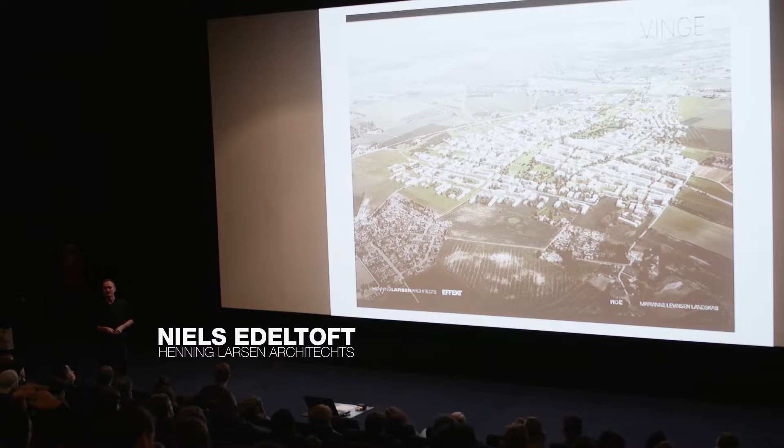But yes, I'm Niels Edeltoft from Henning Larsen Arkitekter, and I've been working at Henning Larsen Arkitekter for quite a while. And I've been connected to the planning of this new city close to Frederikssund for the last 7, 8, 9 years. I just have to explain why I've been connected to that for so long.

And this introduction to Vinge is divided into, I think, 2 pieces, and that's because we were invited to participate in a competition 8 years ago, and it was about developing this new city, Vinge, close to Frederikssund. And there was actually no winner of this competition. It ended up with these 5 teams working in parallel and handing in our suggestions, but no winner was pointed out for that competition.

We worked together, I have to mention that, with EFFEKT Architects and Moe, the engineers, and Marianne Levinsen as the landscape architect. And I think the whole thing was stopped or on hold because of the economic crisis and because of kommunesammenlægning. I don't know the English word for that, but you put various communes in Denmark together, and that created a kind of vacuum. After that, the politicians didn't know what to do, and that was why this whole project was put on hold, and no winner was announced for the first part of this development.

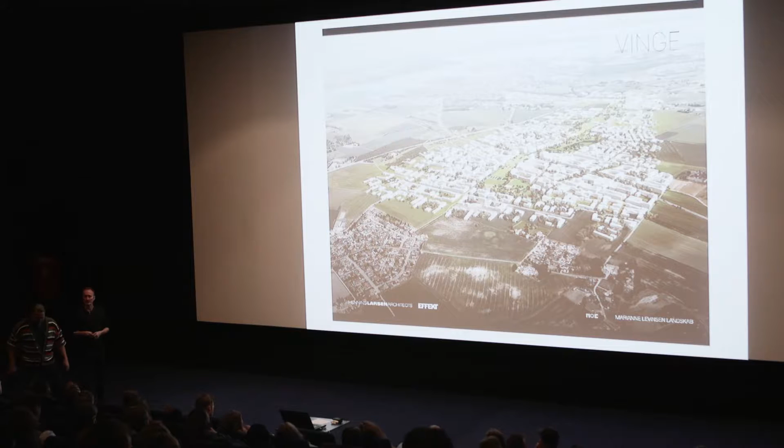Then when the economic crisis eased a bit and things were changing, they started up this whole idea of planning this city here. And actually it's a very old idea; for the last 30 or 35 years, having a city on this spot has been part of the local discussion in Sjælland.

We were invited to participate in this next competition, and the whole program for that competition was actually very much leaning on our idea from the first competition. So in a way we were announced as a winner because the whole program was built on our ideas about how to develop this city. So it was a very good thing that we were part of that competition, and we won that competition.

And then the last part of it is what I would call vision meets reality, and that was the center part of the city. We have been working on that for the last couple of years, and the whole idea was putting this piece of land out for tender so investors can buy the land and start to develop and build this city. So that's the point where all our visions and ideas about the city meet reality. So that's kind of the 2 parts of this.

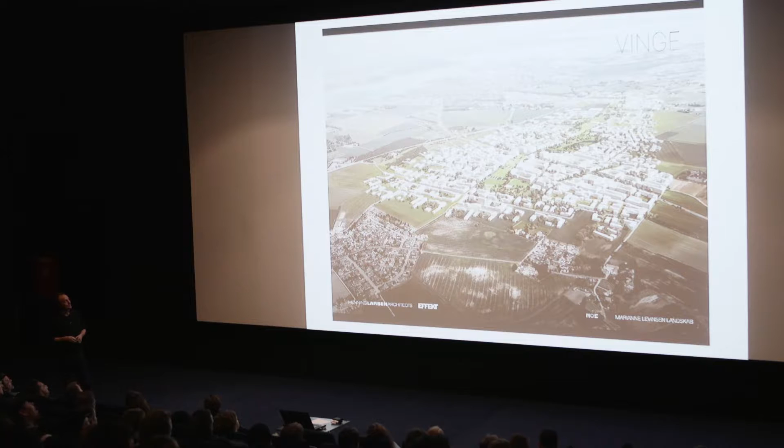The plan for developing Copenhagen, the Finger Plan, I know a lot of you know about it, but it's actually a very old plan, and the whole idea was that Copenhagen should be developed along these fingers of a hand. So you densify the city and all the buildings along these fingers, with infrastructure running along the fingers, and then you have the green areas running between the fingers. So everybody is connected very close to a big green area, and this green area is drawn all the way into the center of Copenhagen. That's the whole idea of how Copenhagen should be developed.

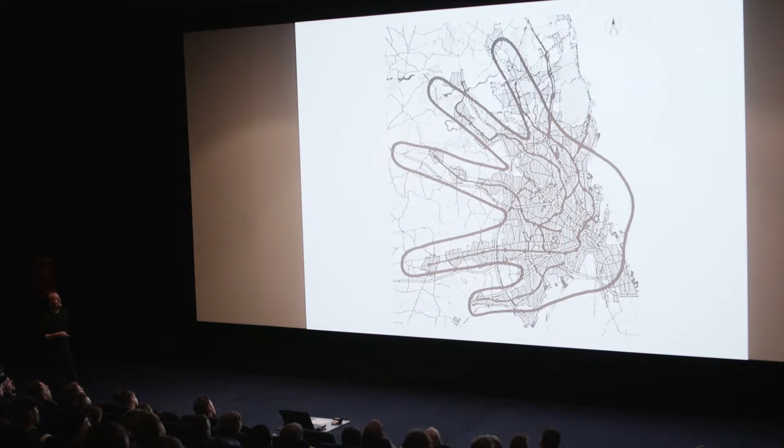When we started this, I will explain about Vinge in the way of how we have been working on this project, what we are doing, and how we are analyzing the site and all that stuff. And hopefully from that you can get the idea of why Vinge looks like it does.

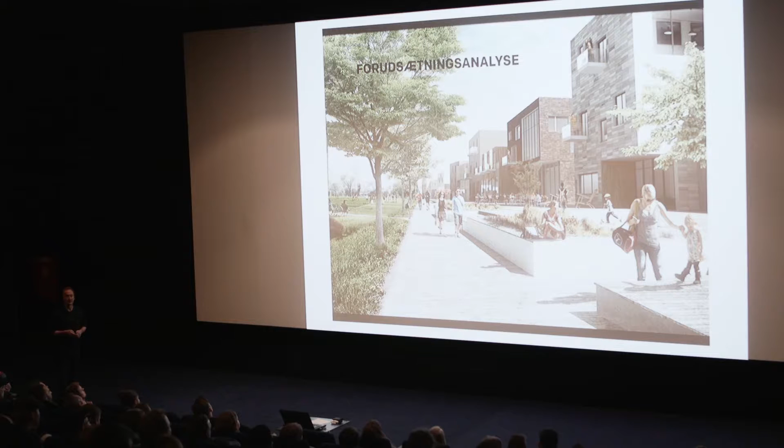And of course we start up with analyzing the context, all the stuff you have on the site already, and from there you develop the main design grip on the city. So you have to have an overall design for that city that is so clear that everybody knows how the city should be developed, and actually make it realistic so the plan can develop from that main idea.

And when we look at the existing conditions up there, we have of course some topography we have to regard. Compared to other places in Denmark, it's quite hilly. You have a difference of 10 or 15 meters, a very hilly landscape up here, and that's of course part of the whole site.

And then you have the existing buildings up there, mainly farmhouses or smaller villas. There's not much going on this side here, so it's a nice place to develop a city, because you don't have that many buildings to respect. And at the same time, it's a rare situation that you don't have an existing city to develop from, but you have a kind of a clean canvas to work on.

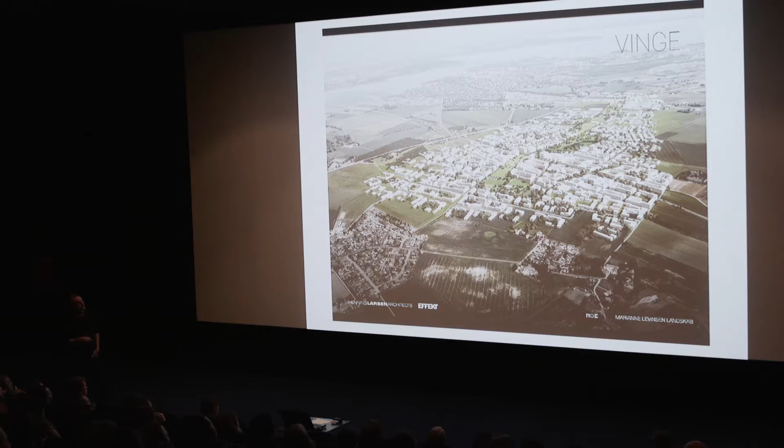I have to go back to this picture to explain that, from the beginning when I talked about the finger plan for Copenhagen, this part of the city, the eastern part of the city, is a very beautiful place with a swampy area and lake, and all that is connected to the green corridor running all the way to Copenhagen. And the other side of this city, you have Roskilde Fjord out here, and from these higher points on the site, you can actually see the fjord. So that's why the city is very well connected to both trains and cars and nature. So it's a very good position for a city.

So all these images are a way to show how we work, how we map the conditions on the place out there. And the next thing is to make a vision for the city. How is the city going to be? What is in the city, and how is it going to be developed? So this vision for the city meets the reality on the site. And the whole idea about the main structure for the city is this long green corridor or spine or heart running through the whole city.

If you look at cities that are about the same size as this in Denmark, you have all the common things. I mean, the sports field, the churches, the kindergarten, the elder houses. All these common things where people go and meet, they are spread like small dots around the city. And the whole idea about this was to drag all these activities into one long spine that connects the whole city. So when you go into the green corridor or the green heart in the city, you have all these activities going on along this corridor. So that was kind of the structure we put on the conditions that were already out there.

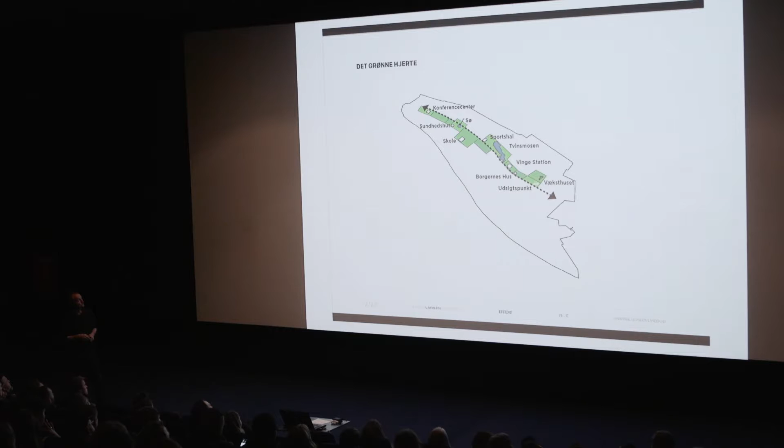So this is the situation with the train running through the site here, and then this green heart running north-south in the city. The next step from this is to divide this into smaller areas, like you saw in the film. It's very important that we at the end look at how is the life between the houses, how does that work, and how do people live, how do people feel the city, and not feel it at 60 kilometers an hour or 100, but when you walk around the city.

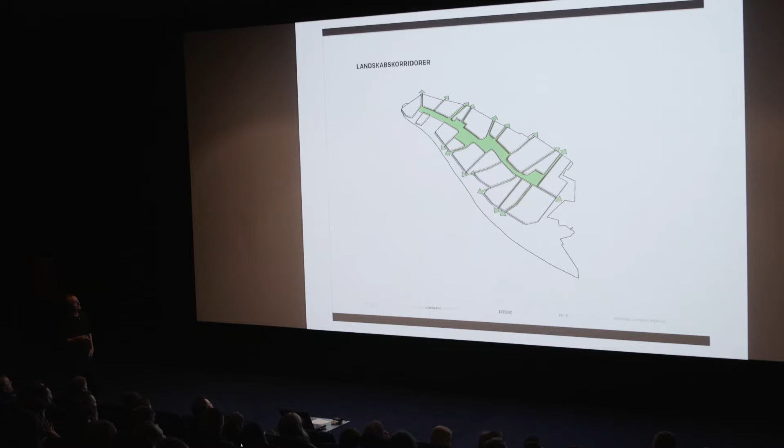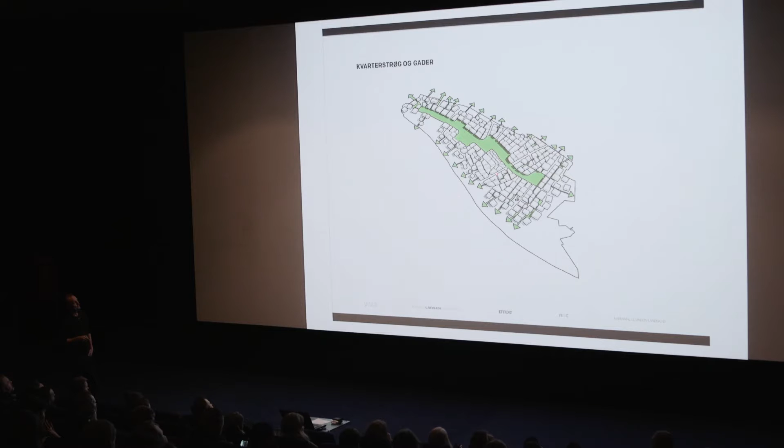And that's why the whole idea from this very simple diagram is to develop that into smaller areas where we have these green corridors that connect the green heart and the whole city to the surroundings, the nature, the fjord on one side and the beautiful nature on the other side. And from that you divide these areas into smaller areas, and that creates the whole structure for the streets running in the city. And at the end, this makes it possible to design or draw this whole map or master plan of the city.

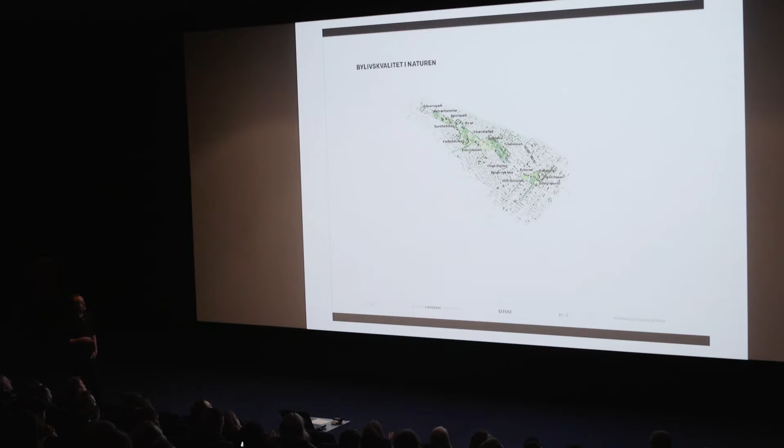Here we have pointed out all the qualities, all the things that could happen along this line. Of course, at this point, it's only ideas and visions for it. It's not reality, but the whole idea about it, because later on, it's important to find out if these things can happen along this line. So that's the whole plan for the master plan for Vinge City. We did the first step of that.

And we have kept these two small villages close to the city, but we have kept them to have their own identity and not be part of Vinge. And then we have the green heart running through and the corridors spreading around here. And we have the junction that connects Frederikssundsvejen to the new bridge crossing the fjord down here. And at some places we have roads or railroads crossing the green heart. But it was mainly meant that the green heart should be for walking or bicycling

along this northern-southern direction. And from ancient times, there was actually a path running here that was called the dry-footed path. So way back, this has actually been where you walk. When you walk in this area, you follow this line. It's not exactly like this, but it's a good story.

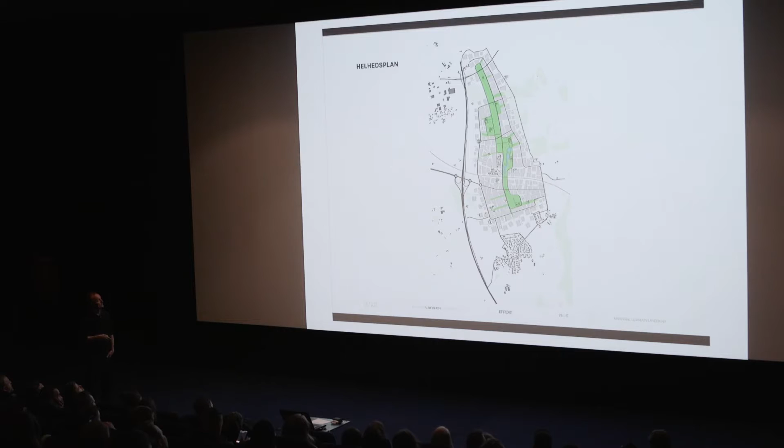The next step is to point out the main structure for the city. And of course, the structure for the buildings is very important. How is the structure? And the density. Where's the density? It's not a city that's equal all the way from the north to the south. Of course, there has to be some variation in the city. So that's why the density is very important.

And the green structure, we have the green heart and green corridors. And the blue structure, how will the water run? It's very difficult to get the water to run uphill. So that's why we have to make the plan of where this water run has to be connected, where these green spots are and how the city is developed. And then again, how the infrastructure is mapped upon all these things. And this is for the more soft, for the people walking or the people on bicycles. How do they use and where do they go in the city?

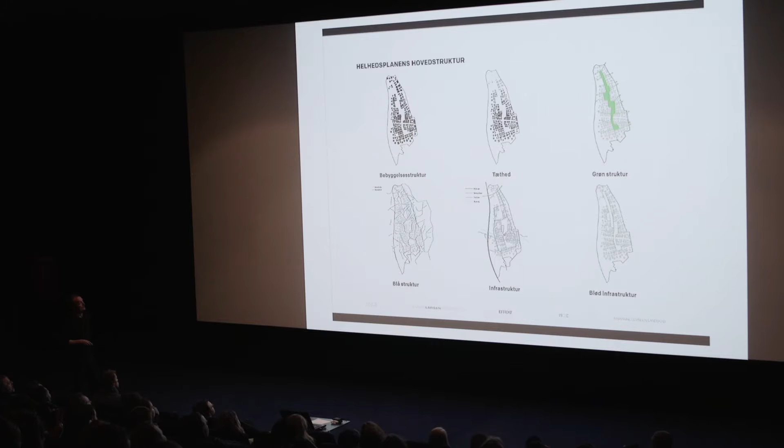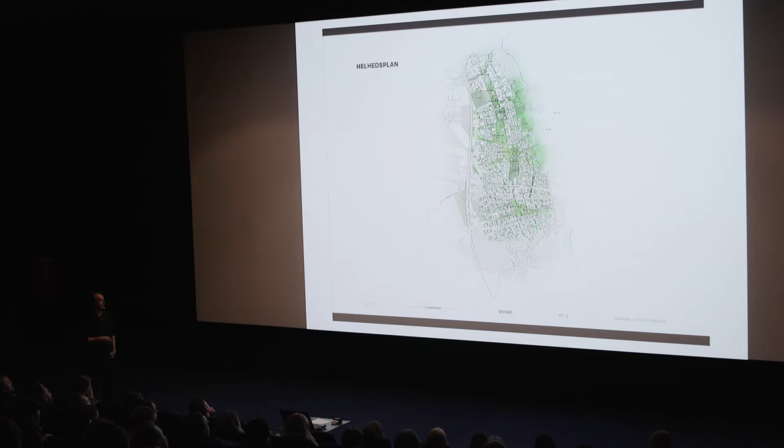So all this is kind of the mapping put on the reality on the site out there, and that makes the whole master plan for the city. And you can see the surroundings around here. You have the beautiful nature out here, and there's a big lake down here, and there's a swampy area and small creeks running here connecting to the river, and you have water running from here connecting down to the fjord. So that's how this plan is a mixture between the whole idea about the city, how it's structured, and then the reality on the site out here.

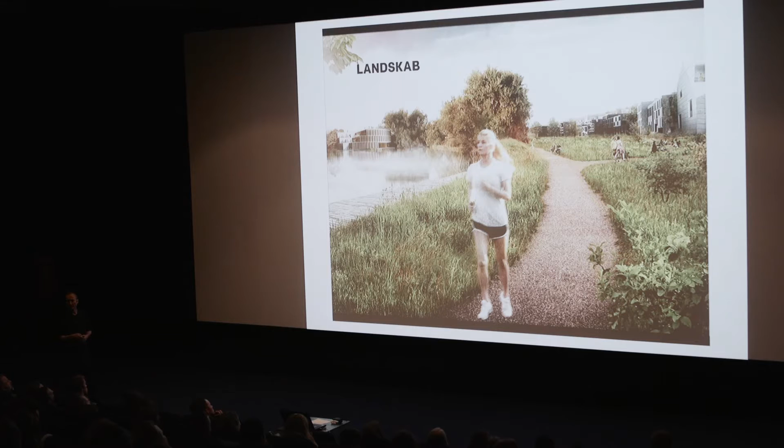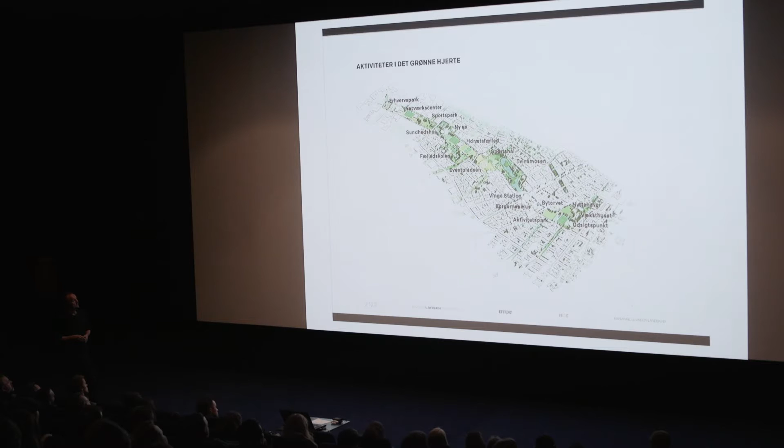The landscape is a very important thing about the city. We had the idea from the beginning that the landscape should be very integrated in the city, that it's not only a city, but it's a landscape and a city, and you can't tell exactly where landscape stops and city starts. So that was the vision for the city from the beginning, that landscape should be a very important part of the city. And these are all the activities that we thought could be going on along the green heart of the city.

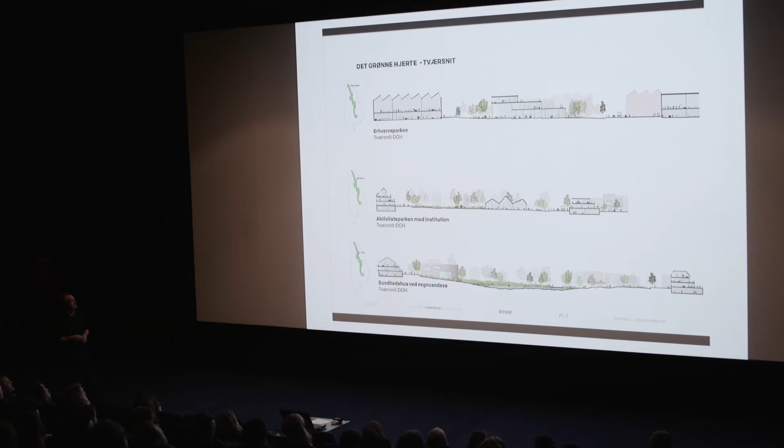And all these sections are from the green heart to see the variations in the green heart. And this is how the water runs in the city, and the green corridors, and the smaller sections of the city, and how the nature reacts to the city.

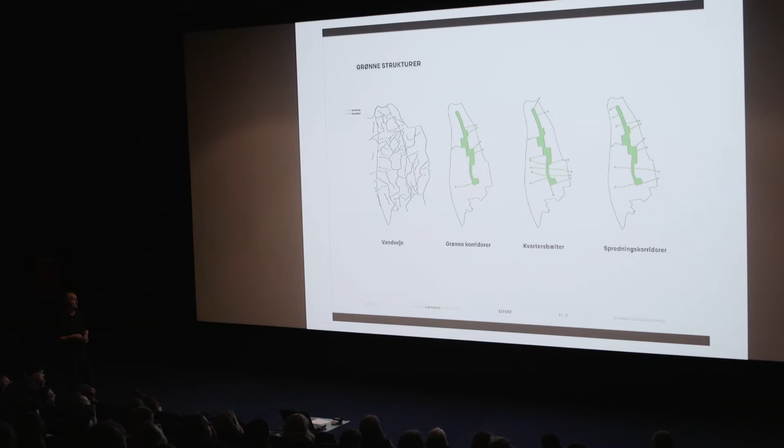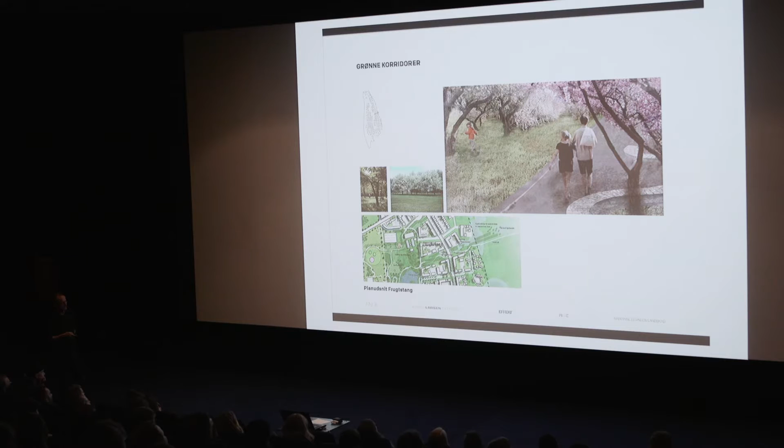And these green corridors that are shown here, we took all of them and gave them their special identity. So it was not just a green corridor; each had its own identity. We only brought one of them here, but all the green corridors were shown in terms of how they should be designed and what should be part of that corridor.

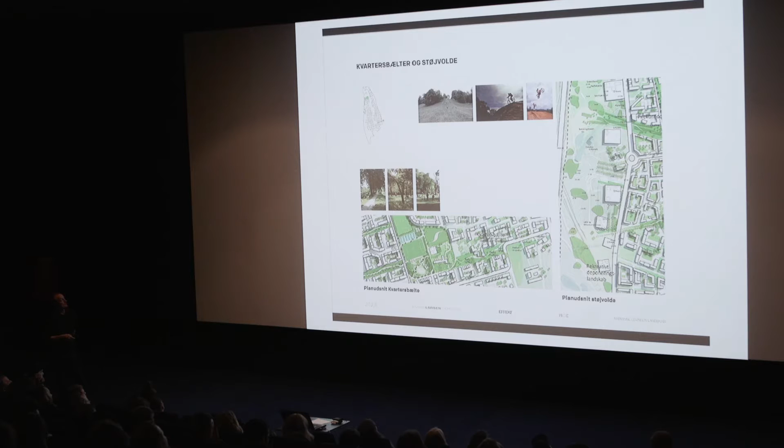We did some analysis on the city, and the most important thing in this city is the center. That's where the whole city starts, and we have to make sure the train doesn't divide the city into two parts, but that the station connects the city across the railroad line.

So that's regarding the infrastructure and the landscape. We have the green corridor running over the station, the railroad running here, and the green stuff running over the station. You cut a hole in this and drag all the water from the nearby areas into the station, so you could have forest on one side and water on the other.

So when you leave the train, you get a feeling that you're entering not just a city, but a combination of a city and nature.

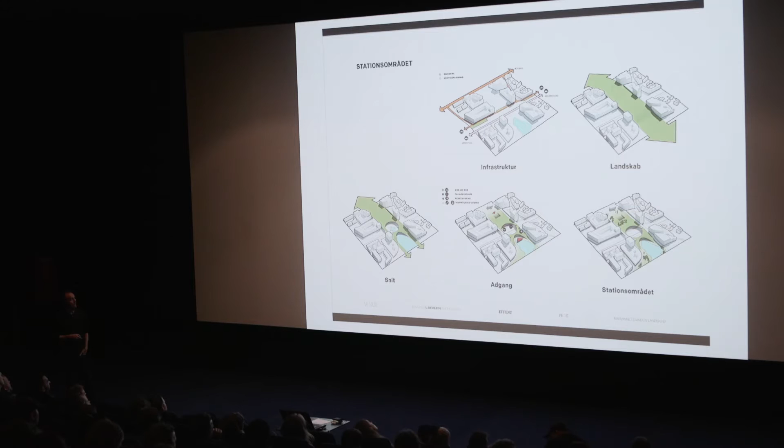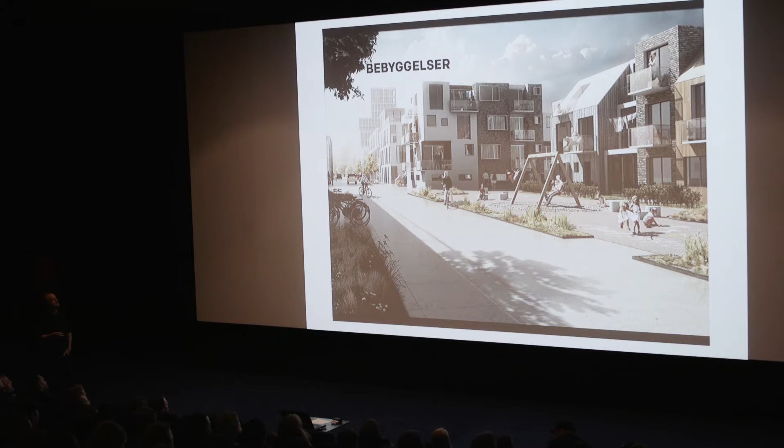And then this is a vision for the buildings, and of course this later has to meet the reality when you look at who wants to live out here, how they want to live, what kind of streets they want, and the height of the buildings and all that.

So we set the principles for the buildings based on the density of the city. You have a denser city along the railroad in the middle and the station, then access to the city from this point, and the main road into the city. All the functions of the city are divided into different areas along the line here. What could be put in the center of the city?

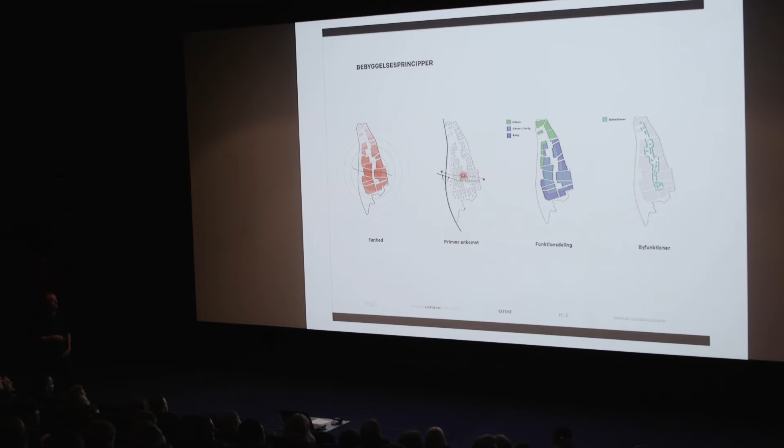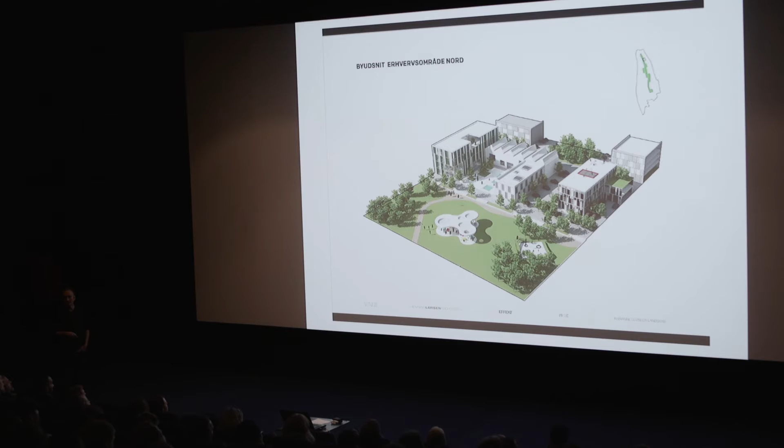And then again, we analyzed the way the buildings meet the green heart, and what the whole atmosphere between the buildings is like. So we did a lot of analysis along the green heart and in the city to see if the scale was right.

And some figures, to find out how big these areas should be, whether that was a good unit to develop, and the heights of the buildings, the roads, the streets, the squares, and all that. We did that for the whole plan.

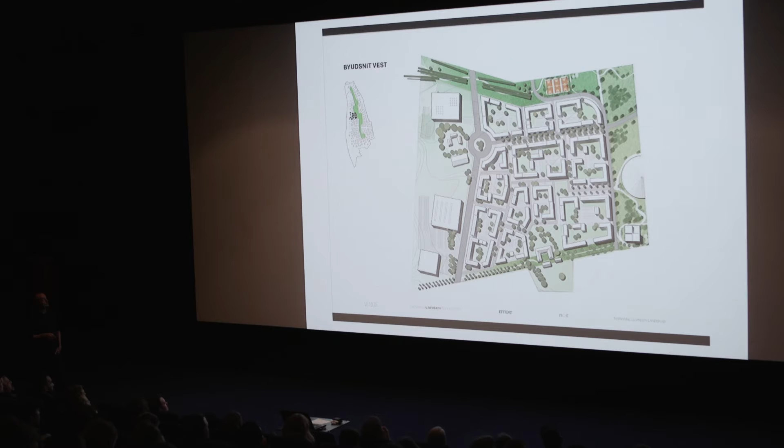That's this area up here, and we had all the big boxes—Rema 1000, Jysk Sengelager, and all that—out close to the main road connecting to Copenhagen, so that people visiting these places don't have to cross the city, but could still give life to the city without crossing it with their car.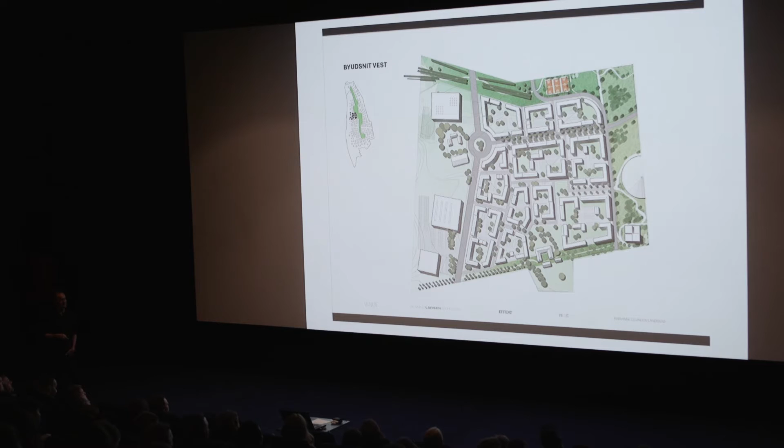At the same time, you have people from this point crossing the fjord going to their summer houses. They stop up here and use the city to buy stuff. People from the whole area come to this city and commute to Copenhagen from there. So it was also a city for commuters, not only for the people living there, but for people using the train station to Copenhagen.

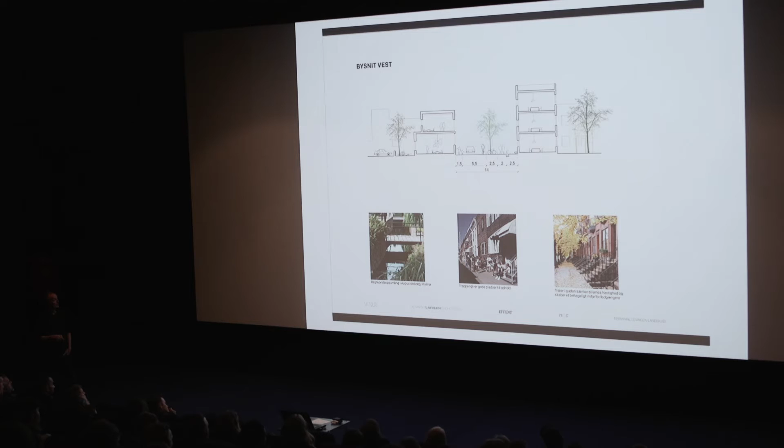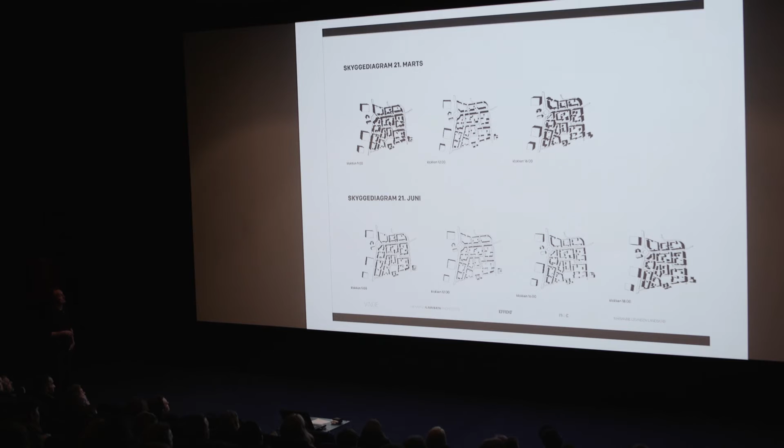Then, a step further, closer to how this street should be designed, and how life in the street could be if the layout was like this. We did some diagrams showing where you have the sun in the evening and morning, in summer and winter, to create a big variation in the life between the houses.

And we compared all these areas by the density of the buildings, with examples to show people what that density means—if you have this density, what could you compare it to? We mapped all this into the site, and that was the master plan for how the city should develop.

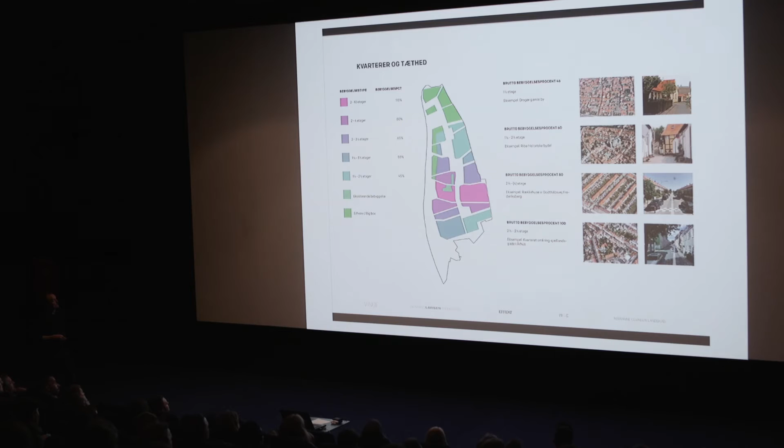And of course the infrastructure—this is an early image of the landscape crossing the station. You have a lake, a swampy area going all the way into the station, and you could have a forest on the other side.

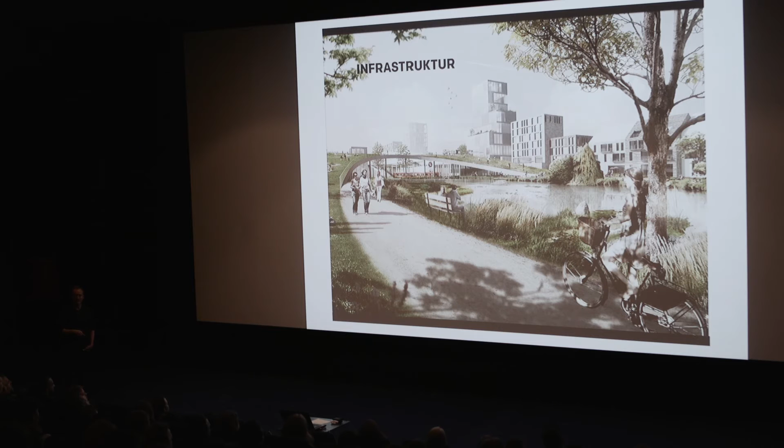So that's how to show that this place should connect the city and not divide it into two. You have these tall buildings in the middle, so there was an idea of going up to 7, 8, 9, 10 stories in the middle of the city to make it a dense city and not an average city.

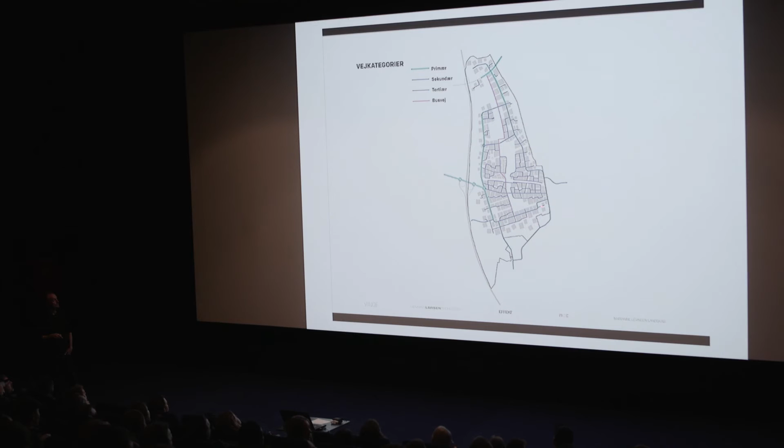And that's all the roads, the cars. We counted all the cars and found out how the traffic should work, where you should cross the Green Heart. Only a few places, and you still have the opportunity of crossing the railroad here and in the middle. So you have a structure that is working, so people don't have to cross the whole city, but could follow this to where they live.

And this is the outline of Vinge, and it's called Vinge. They had a competition in Frederikssund about the name of this city, and I think it was a 12-year-old kid who said it looks like the wing of a bird, so that's why it's called Vinge. So you have the fjord out here, and you have the connection.

Here is the connection where the new connection across will be, at this point. So from here you could follow the new road to this connection here, or into the city, and the railroad that is running here, and you have the station in the middle here.

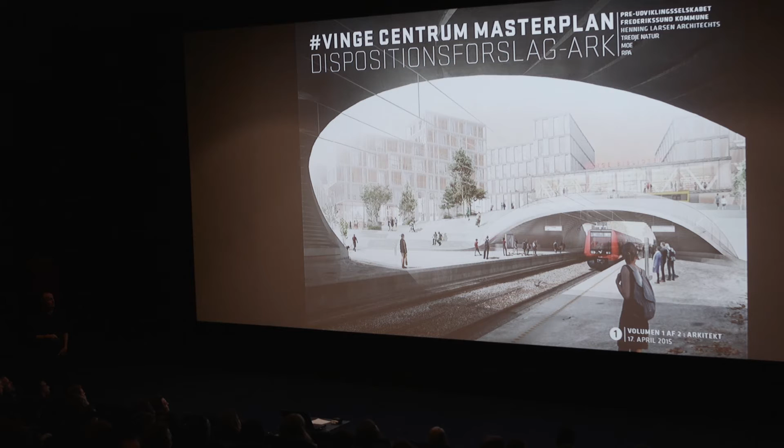So that was the first part of what we've been doing in Vinge. The next part of it was a new competition. We won that competition, and it was the first step into realizing, making a realization of Vinge.

This was, Frederikssund wanted to develop the center of the city as the first part of it. This area is actually under construction now, so that's the first part of the whole city. We didn't design that, but that's actually under construction now.

But they wanted to show that they meant this, that they wanted to develop this city, and that's why they bought all the land in the middle, and that's why the first stage of the development of Vinge is in the center of it.

And our job was to make this realistic, so you could get investors interested in buying this piece of land and developing Vinge. So that's where the vision meets reality. All the beautiful ideas we had about how the city should be now met the reality.

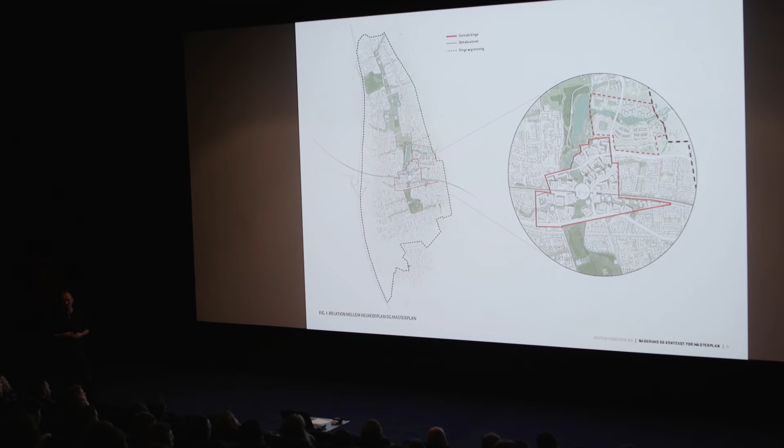We had a couple of investors on board the team who guided us. Of course you have to analyze who's willing to move out to this city, and what do they want, how do they live, how big should their houses be, and all that stuff. So that's a very interesting stage where you have to get this vision into reality.

So we had the whole idea about the buildings from the first competition. We developed that into the next stage, where we said we don't want that. We had a lot of variations in the building in the first competition, but in this stage we have these square boxes, and we use that as a catalog for the buildings we want to use, and you can combine them in a lot of different ways.

And that's the interesting thing, and the good thing about that is that we create a big variation of room between the houses. And that's a very good thing when you look at the wind. When you have the western wind running here, if you have these variations, it will not speed up. So you have a kind of look at the microclimate at the same time.

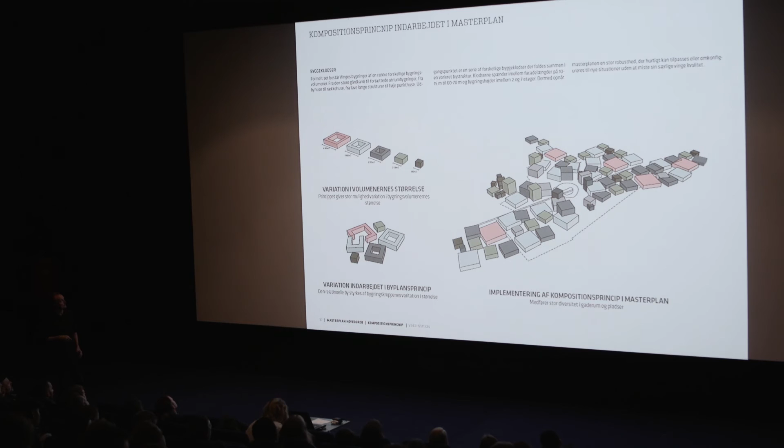And then again, you have the sun. When you look at the sun, you always have small spots where you can find the sun in this city. So that was the whole idea, that we have this catalog of houses, and we put them into the area.

We have the station in the middle, and it was one big element, a big bowl that connects the Green Heart across the station and the station to the sides of the city. And you have all these rooms between the houses, all these variations in building, and of course these elements are changing in heights as well, and you have the more dense city around the center in the middle here.

And Frederikssund Kommune wanted to be there as well. They have a library in there, a children's garden, a fighting sports center, and other activities. So Frederikssund Kommune is actually going to rent part of this, the center of it.

It's just for them to show that they mean this city. They want to live and be part of that as well.

You have the Green Heart running from here, and the whole idea is that the town develops along the Green Heart. Of course, you don't have the Green Heart running through the whole city, but when you develop this part of the city, you have a small part of the Green Heart. So you always put the city close to this Green Heart, and the size of the Green Heart makes sense when you develop this city. So it's not only a vision, but it's actually working when you develop the city in stages.

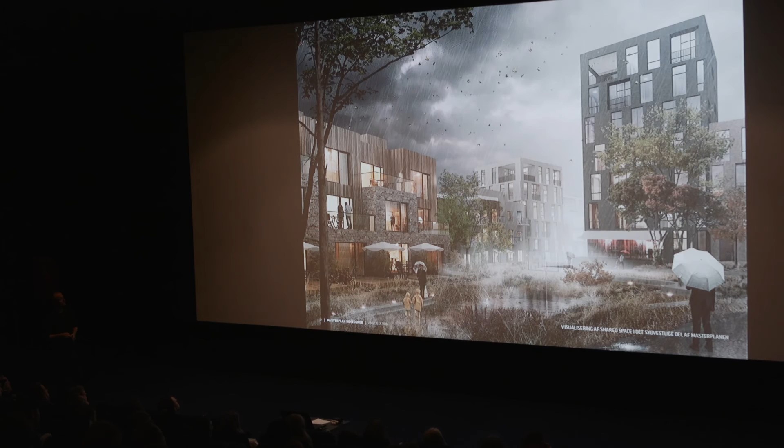This is an image close to the station, where you have the high rise, or the higher building, close to the station. I don't know what this umbrella thing is doing here with all this water, but nowadays all your images have to show some rainy water and clouds and all that stuff. That's how we do it now.

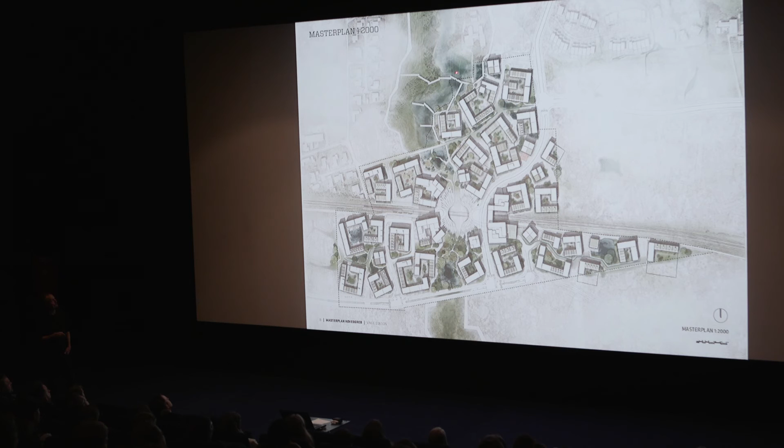That's why the Green Heart is sometimes a function of the city, and sometimes it's a thing already existing out there that creates the Green Heart.

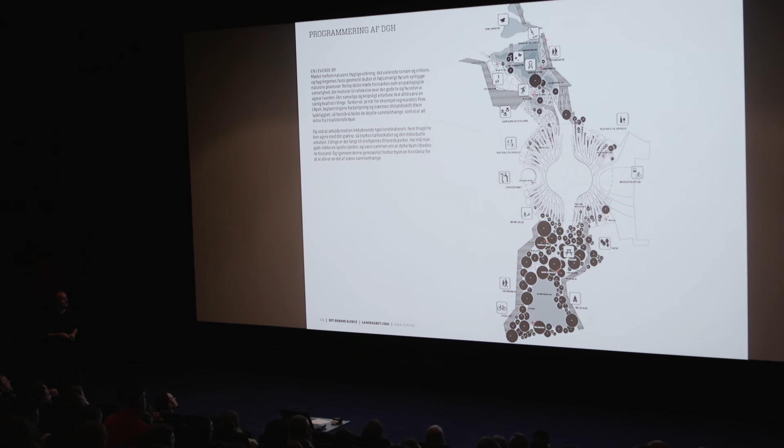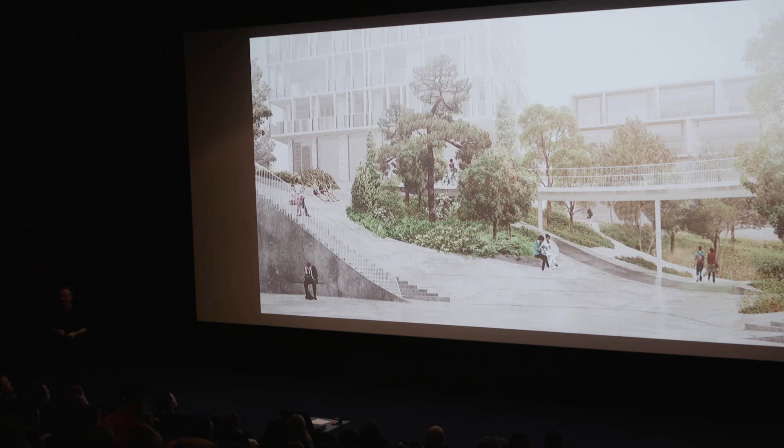This is images from the station with the forest part, and you have a bridge crossing here, so you have a circular connection on the square. You'll have shops and, like I talked about, the library, the children's garden, fighting sports center, and all that going on at ground level of the building, so you create life on the streets in the city.

That's just to show that the whole idea from the beginning with the Green Heart and these corridors are followed up in the first step of the city. So we hope that the whole structure of the city is so robust that it can be developed in a good way.

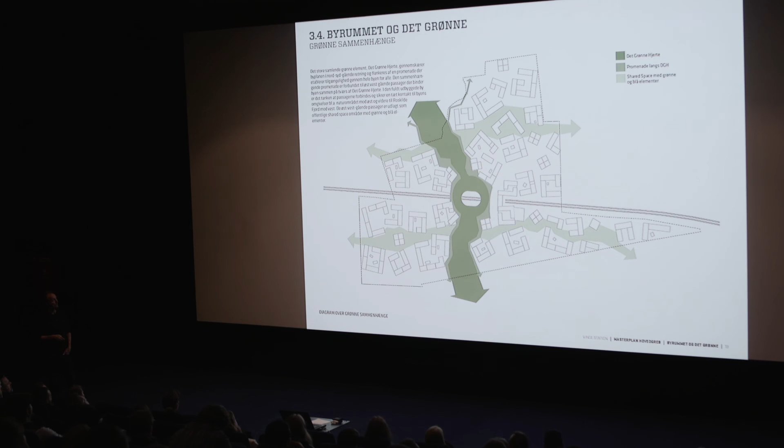I think the interesting thing for us is that we've been part of developing the whole concept for the city, and now taking part in the next step of the realization of this city, where the vision meets reality. That's a very good thing, not just making the city and all the visions, but actually finding out if it works. There are a lot of conditions you have to consider if you want to create a totally new city.